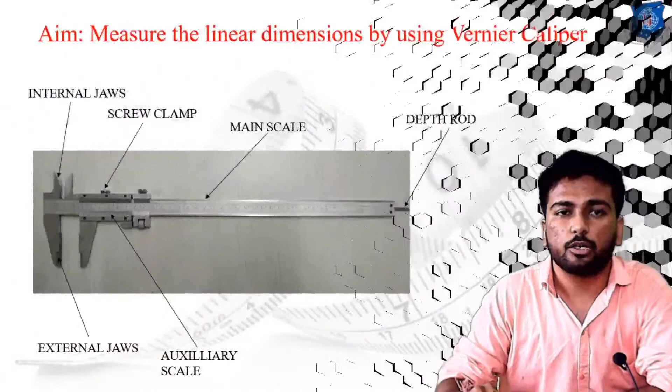Today we are going to start our practical with the aim of measuring linear dimensions using the vernier caliper. Before going for the actual practical, let us first understand the constructional features or constructional details of the vernier caliper, because it is a very helpful instrument for the subject.

This image shows the vernier caliper. The vernier caliper contains internal jaws, which are useful for measurement of internal dimensions. Suppose you have to measure the internal diameter of a hole, then you use the internal jaws. If there is a bearing provided and you need to measure its internal diameter, you use the internal jaws.

There is no limitation that we can only measure round sections. We can measure the internal dimension of, say, a square section, a square hole, or a rectangular hole. Whatever the dimension or shape of any internal feature, we can measure it using the internal jaws.

Against that, we have the external jaws. External jaws are useful for measurement of external dimensions, like if we have to measure the length, width, or height of any particular component, then we use the external jaws.

Suppose we have to measure the outer diameter of a component, or any other external dimension, then we use the external jaws for measurement. All the jaws are hardened at this particular stage.

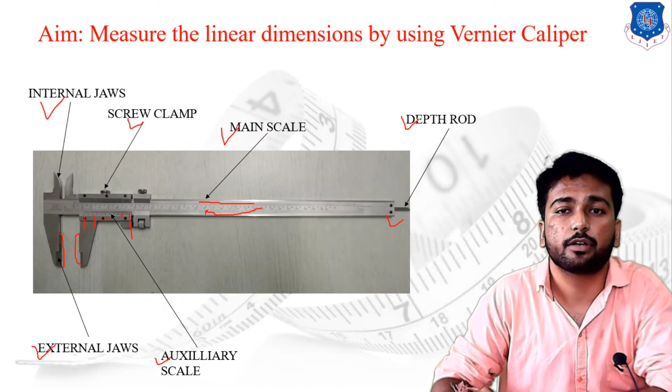So this is the basic constructional features of the vernier caliper. Now let us start the practicals to take readings of different components by using the vernier caliper.

Okay, so let's start the practical.

Here we have the vernier caliper. As we have discussed in the theory section, this is the internal jaws, these are the external jaws, this one is the main scale, and this one is the auxiliary scale. This is the depth rod which is available for the measurement of depth.

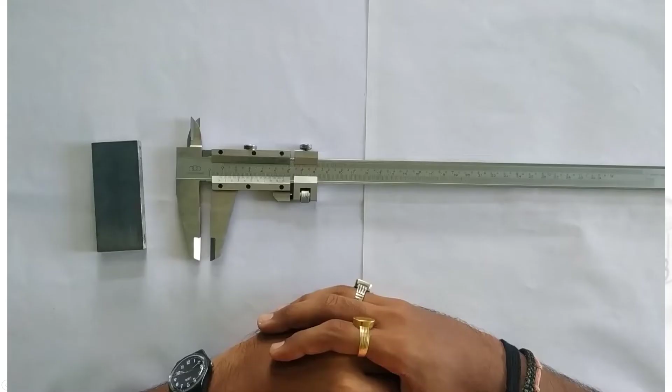So let us start the different readings of the different components. Let us start the measurement of the width of the given component.

To measure the width of the component, first extend the vernier caliper. We have to measure the external dimensions, so we measure from the external jaws. Place the particular component inside the external jaws. Then this is the locking nut; lock the particular workpiece over there. Then you can easily remove the workpiece.

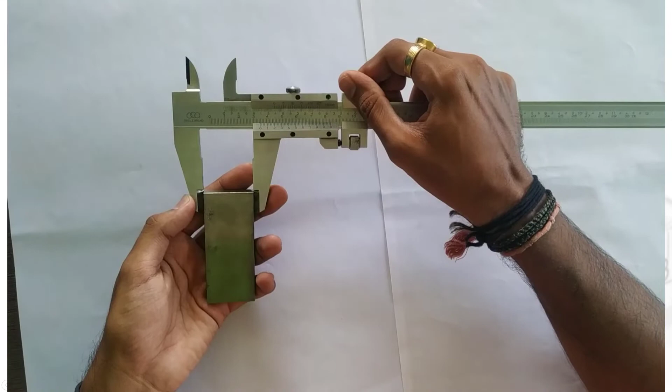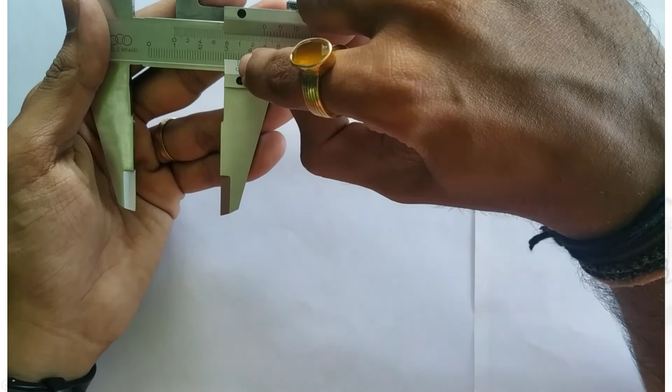Now start the reading. You have to take the reading from the 0 point of the auxiliary scale. First check the particular position of the 0 point of the auxiliary scale where it coincides with the main scale. As you can see from the main scale reading, this particular 0 point coincides in between the 34 and 35 mm mark.

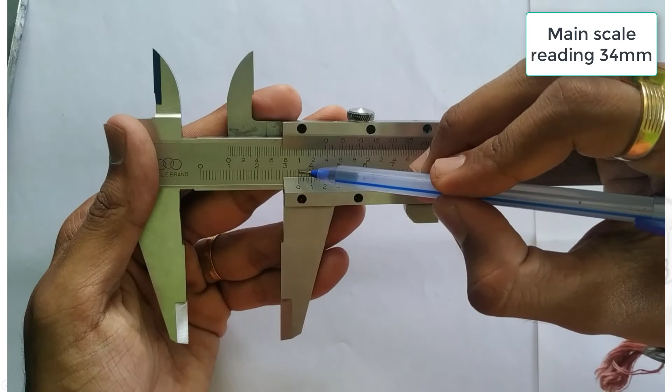So we can say that the main scale reading of the particular vernier scale is 34 mm plus something. Now what is the something? To measure that dimension, we go through the auxiliary scale.

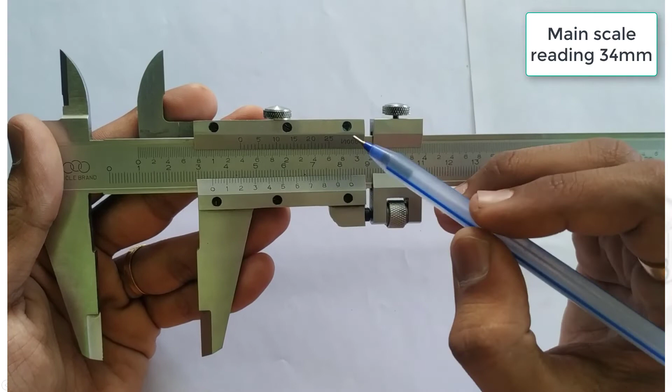Start with the auxiliary scale and check which particular division makes a horizontal collinear line with the main scale. From the particular auxiliary scale, you can check that the division at 8 makes a proper horizontal line with the main scale.

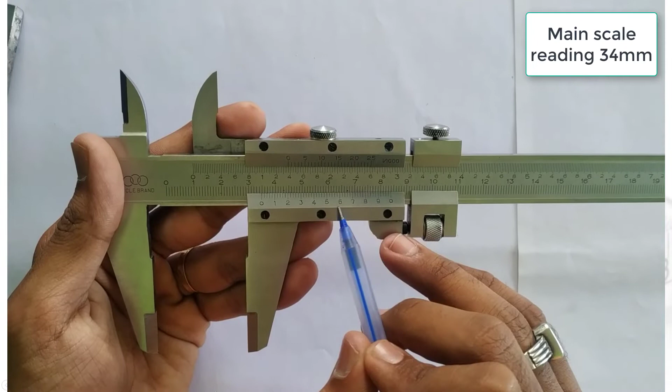As you can check from the auxiliary scale, between 0 to 1 there are 5 divisions, and from 1 to 2 there are another 5 divisions. So we can measure that the total number of divisions at point 8 is 40. So we can say that the reading of the auxiliary scale is 40 divisions.

Now we are going to the calculation. We are going for the calculation. Okay, let's start the calculation portion.

Before going for the calculation, first let us understand the least count. What do you mean by least count? Least count is the smallest value that can be measured by any instrument. For our vernier caliper, the least count is 0.02 mm. The least count is also known as the minimum distance that can be measured using the whole instrument, including the main scale as well as the auxiliary scale.

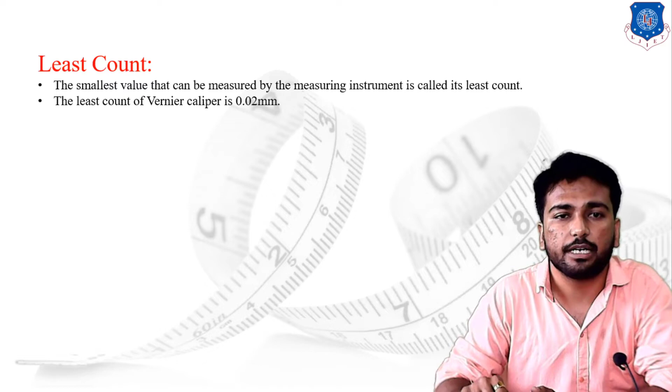Now let us go for the calculation. The basic equation we are going to use is: final reading equals the main scale reading plus auxiliary scale reading into the least count. Remember this equation because it is ideal for all practical purposes. So we are using the same equation.

If we take the first reading, from the practical session we noted: the main scale reading is 34 mm, the auxiliary scale reading is 40 divisions, and the least count of the vernier caliper is 0.02 mm. Putting all values into the main equation: final reading equals 34 plus, in brackets, 40 into 0.02. So our final reading becomes 34.80 mm.

So this is the first reading, the first reading of the calculation that we have taken. Now let us go for the second reading.

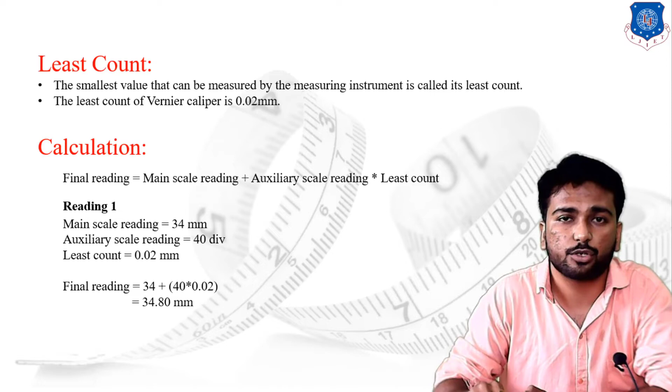Now we are going to measure the outer diameter of this particular rod. To take the outer diameter, first extend the vernier calipers, place the workpiece inside the external jaws, then using the locking nut, lock the scale. After locking the scale, check the particular reading of the given component.

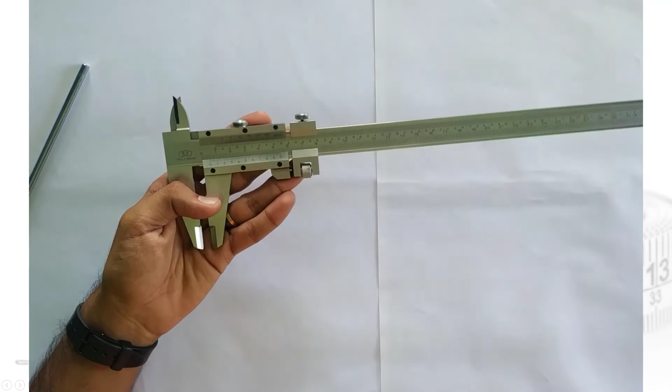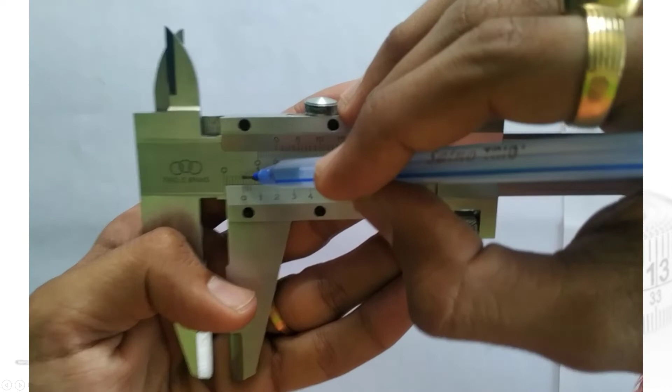As discussed, you have to check the 0 point of the auxiliary scale over the main scale. From the main scale, you can check that the 0 line of the auxiliary scale is placed between 5 and 6 mm. So we can say the dimension of the outer diameter of the given rod is 5 point something mm. We note down the main scale reading as 5 mm.

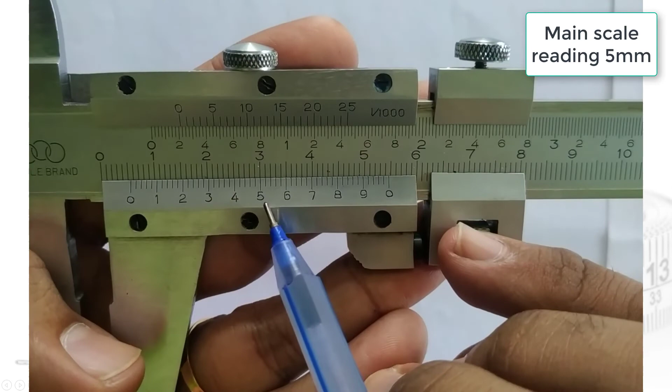Then find out which particular division of the auxiliary scale coincides with the main scale. Starting from the 0 line of the auxiliary scale and moving towards the end, you can check that the 5th number division perfectly coincides with the main scale. Calculate the number of divisions in between: 5, 10, 15, 20, and 25. So the auxiliary scale reading is 25 divisions.

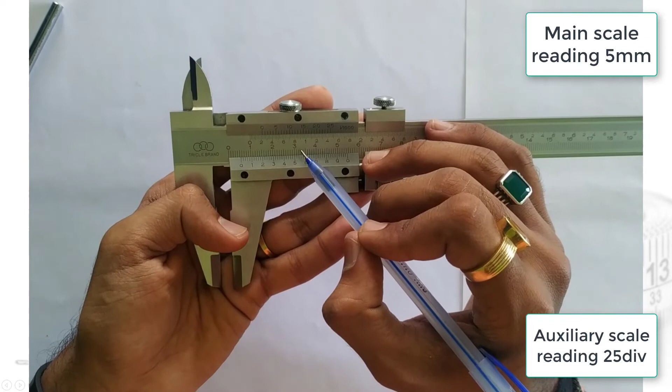Now we are moving to the calculation portion. We know the equation: final reading equals main scale reading plus auxiliary scale reading into the least count. The main scale reading is 5 mm, the auxiliary scale reading is 25 divisions, and the least count for the vernier caliper is 0.02 mm. Putting all values into the equation: 5 plus (25 into 0.02). So our final reading of the given component is 5.5 mm, or we can say 5.50 mm.

So that is our calculation of the second reading that we have taken. Now let us go for the third reading. Let us take the third reading.

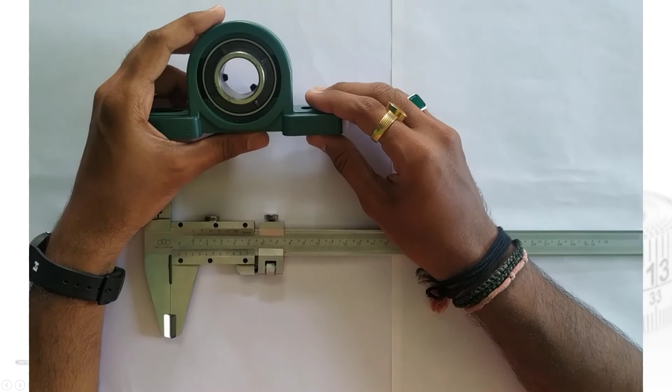We have a particular housing that carries a bearing, and if we have to measure the internal diameter of this bearing, we have to use the internal jaws. First extend the vernier caliper, place the internal jaws of the vernier caliper inside the bearing, lock the scale using the locking nut, and then move on to the reading.

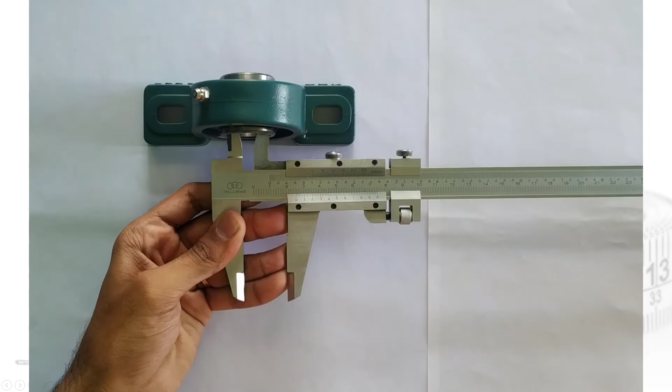As discussed, first check the particular 0 position of the auxiliary scale. As you can see from the scale, the 0 position coincides between 25 and 26 mm. So we can say the dimension of the internal diameter of this bearing is 25 point something mm.

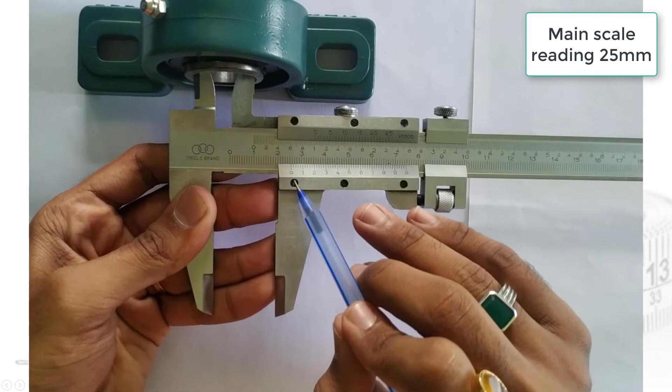Now check which particular auxiliary scale line perfectly coincides with the main scale reading. Moving from the 0, you can check that the 6th number division perfectly coincides with the main scale. Calculate the number of divisions: 5, 10, 15, 20, 25, and 30. So the auxiliary scale reading is 30 divisions, and the main scale reading is 25 mm.

Now we are moving on to the calculation. We have noted the reading, so let us calculate. We know the equation: final reading equals main scale reading plus auxiliary scale reading into the least count. The main scale reading is 25 mm, the auxiliary scale reading is 30 divisions, and the least count is 0.02 mm. Putting all values into the equation: 25 plus (30 into 0.02). So our final reading will be 25.60 mm. That's our calculation of the third reading.